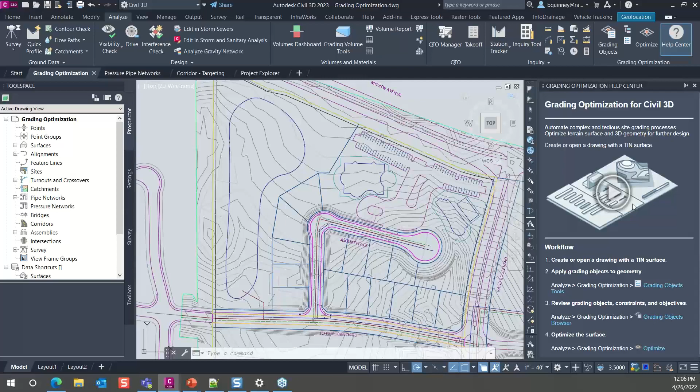Another change with grading optimization occurs with non-collinear feature lines, which means when this information is returned from the grading optimization, it doesn't duplicate your feature lines. It takes into account the same feature lines that went into it. Trying to figure out how to best say that. So it minimizes a lot of program instability that may happen from these objects occurring in the same site in the same space. So that is a huge improvement.

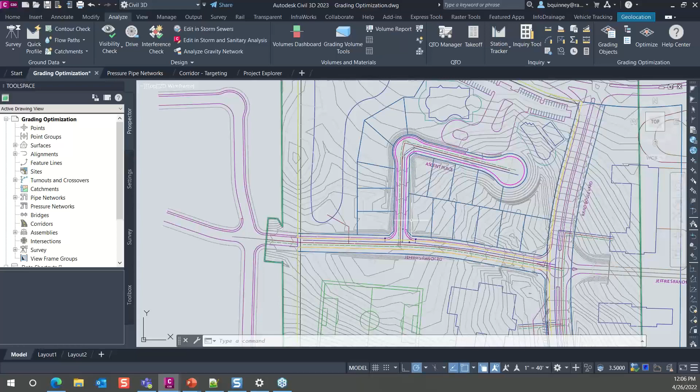What I want to do with this space here, I've got this set up. Since I'm discussing grading optimization, I've got a couple of items here in terms of my grading limits. I've got an inner limit for the whole site, set some parameters in place.

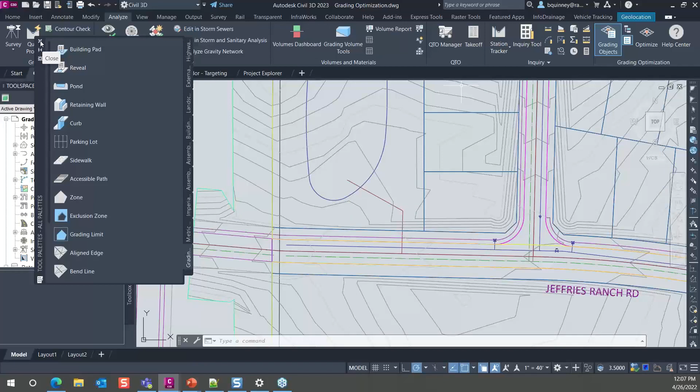This may be new for some of you who have not delved into this feature in the previous release. This is some very good stuff, and it's accessible through your tool palette. So assignments are easy to assign to your object and the geometry within the drawing, for being able to assign various parameters, building pads, zones, low points, drain lines, and the like.

So in the optimization, I'm going to jump in there. I've already got some overall setups going. For those who've seen this before, it looks a little different. There's been some cleanup in terms of how the grading optimization is arranged. We've got the progress meter that's been updated to give you a better sense of where it is in the optimization. Usually it hangs around between 0 and 10% for a long time, but that depends on your site.

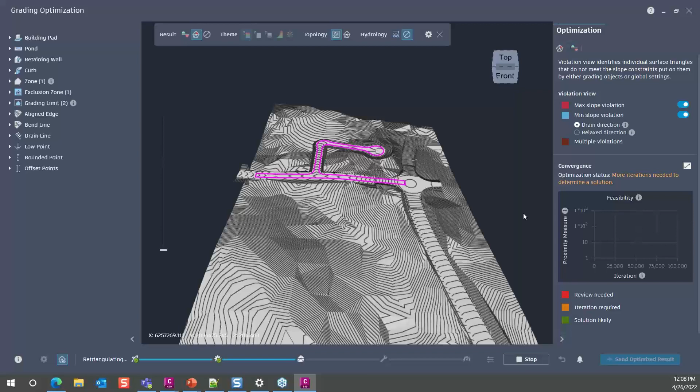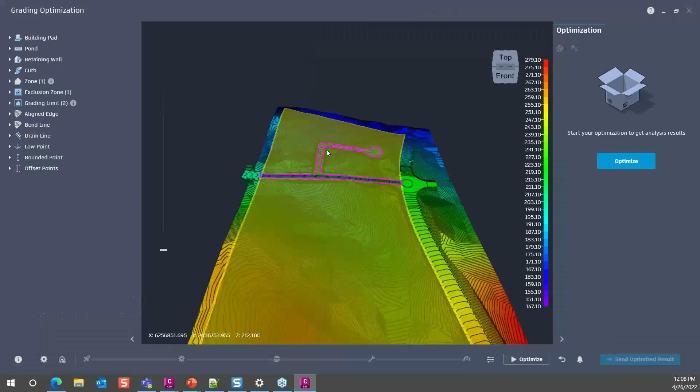You'll notice in here now when we optimize, and notice I did jump in without having to set any parameters or anything, we've got some retriangulation going. It gives you the progress, shows us what's going on. And I did kind of move over. Excuse me, my optimization just kind of got out of my way there for a moment. Let's see if I go back in there. All right, let's try that again.

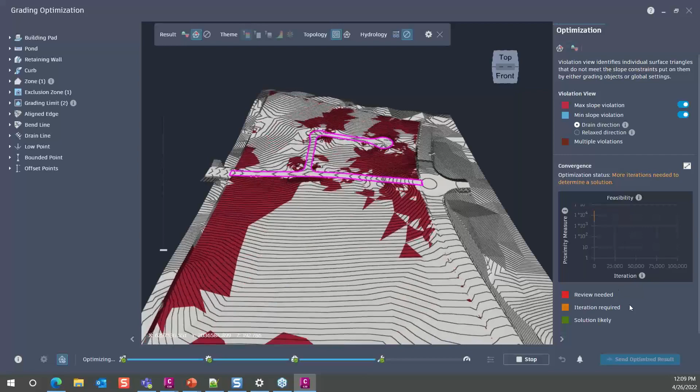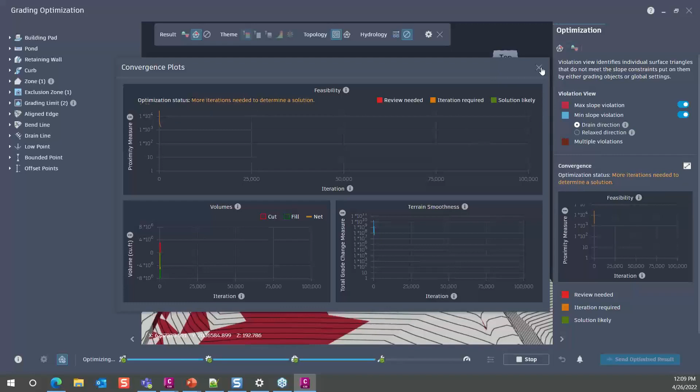All right, in that optimization, everything's moved over here to a panel for the optimization to allow you to make certain determinations, adjustments, be able to reveal things going on within your feasibility charts and graphs. So if I want to take a look at my convergence plots, now they're accessed with a simple icon over here on the side. And as I mentioned, there's the progress down below showing what's going on at what time.

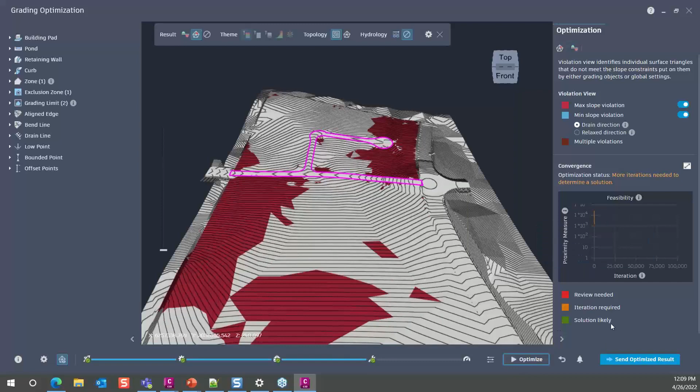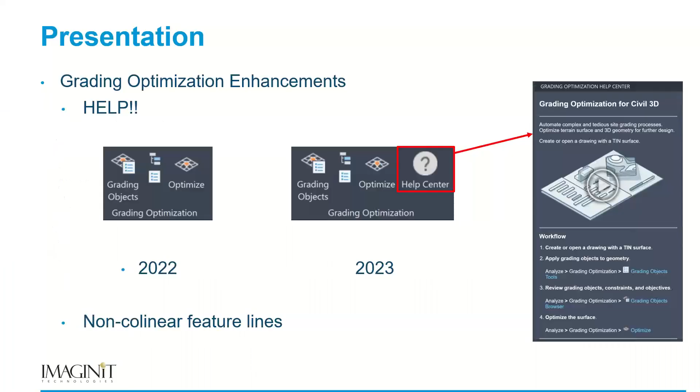There's also a notification center that comes up when there are errors or problematic parts that may happen during an iteration of the process. I'll go ahead and stop that there. Don't need to send the optimization back, but that's a nice reorganization of the grading optimization feature. There was a lot of guesswork in terms of what we were looking at in the progress meter, so that definitely helps clear that up. The steps you'll find in there are the start, prepare, retriangulate, pre-check, and optimize, so you'll know what's going on whenever.

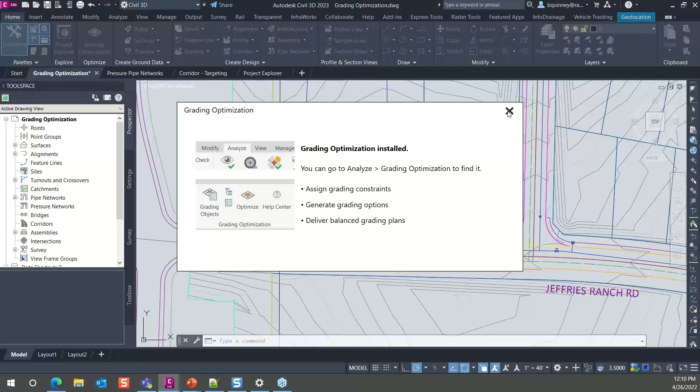That notification center and this ribbon button on the home tab, you'll hear about this being mentioned, or you'll see it by default when you jump into it. When looking at that home tab, let me tell you a little something about this guy here. It's not going to jump to the tools. It just lets you know whether it's installed or not and where to actually go. So ladies and gentlemen, please still go to the Analyze tab in order to run the optimization. Don't let that fool you.

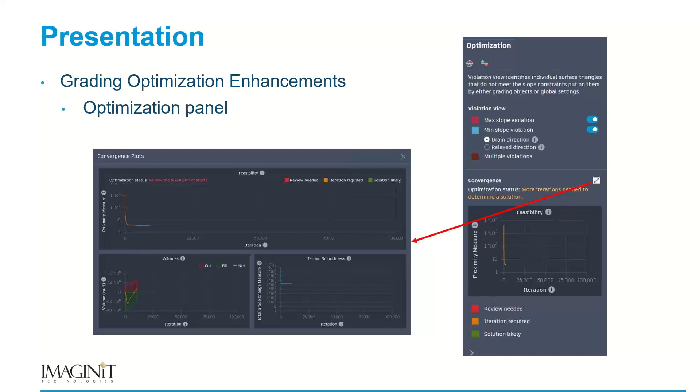All right, jumping ahead, this was a little bit about what we just saw in terms of the optimization panel. So I did get a little ahead of myself. So that's grading optimization. Next, we'll talk about pressure networks, fit and finish. A couple of different additions or enhancements have gone on with this. One, which I really like, is being able to search for your parts when you're adding pipes. For those of us who have very lengthy parts lists, we may find it easier to just search by keyword when adding a part. There's also some grip editing and the profile view improvements, a few other things there.

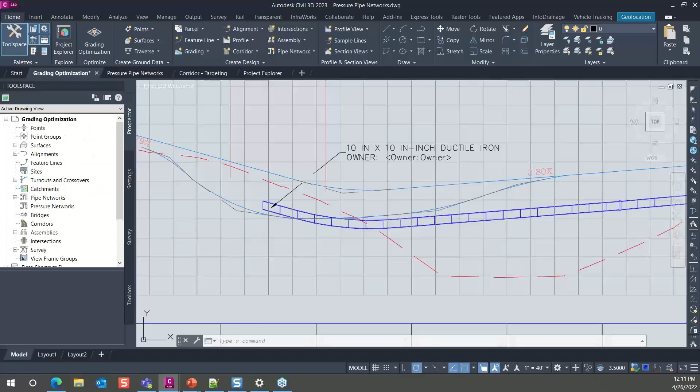Give me a second, let me jump over here and start talking about a couple of these. That first one had to do with adding my pipes. If I had a long parts list here, and I am in the upper left, I have a short list here, but the search for keyword shows up top, allowing you to start typing matching parameters or namings to your pipe so it can jump right to what fits that criteria. So that's a really big help. I've seen some very long and exhaustive parts lists that function better when you can easily find what you're looking for.

I've got right here this profile view, and jumping to talking about property sets for a minute. For those of you who work with property sets, you can attach some additional information about parts that are in your drawing. I've got a label style here that says I want to know who the owner of this water line is, for instance. And it's got a placeholder right now because it is not assigned. The addition for 2023 is that when you assign it in plan view, it will automatically assign to the pipe so it will show up in your profile labels.

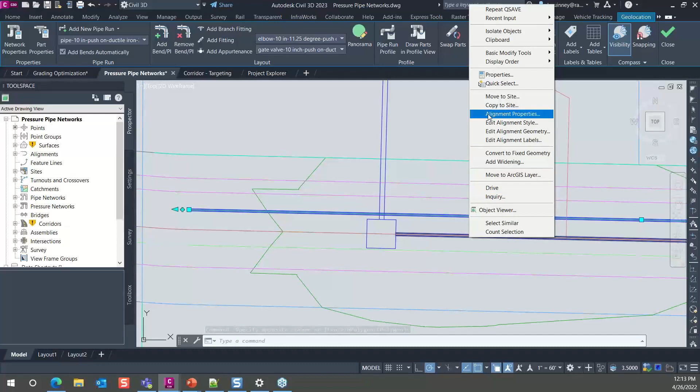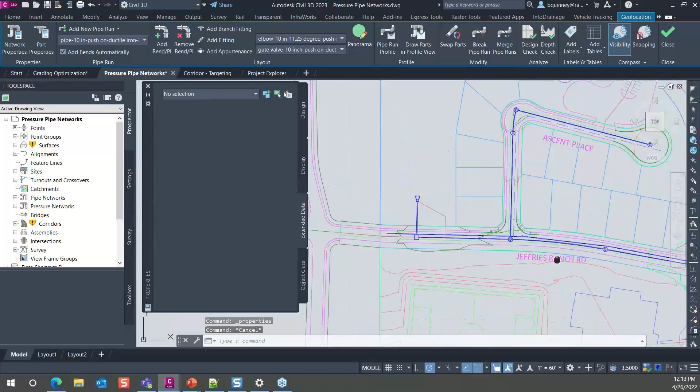So for instance, I'll select my pipe, and in my properties, jump to my extended data where I'll add that property set for the owner. Now I'd already pre-populated it with municipality X, for whoever that may be. So then when I go back over to my profile view, I think I either picked the wrong pipe or,

My first bungle. Funny how that shows up when you're practicing this sort of thing and you need it to show.

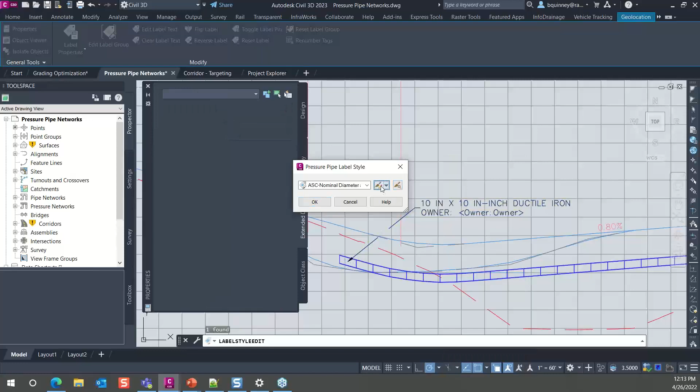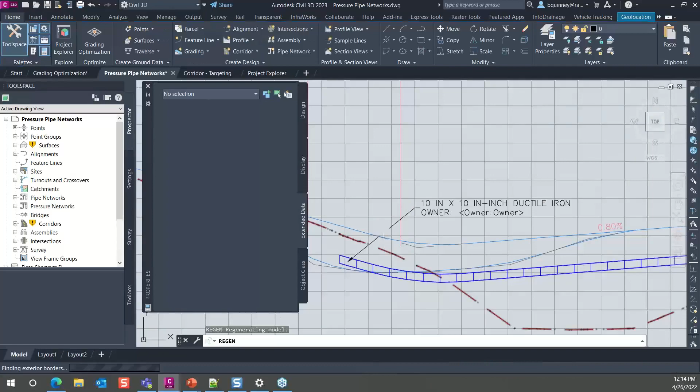Okay, give me just a sec. Let me verify something in here. In my label component, I'll go to property sets. Yep, I've got the uppercase. Everything looks right. It's interesting. It didn't like it. Wow. Well, that's number one. I'll start doing a count on myself here.

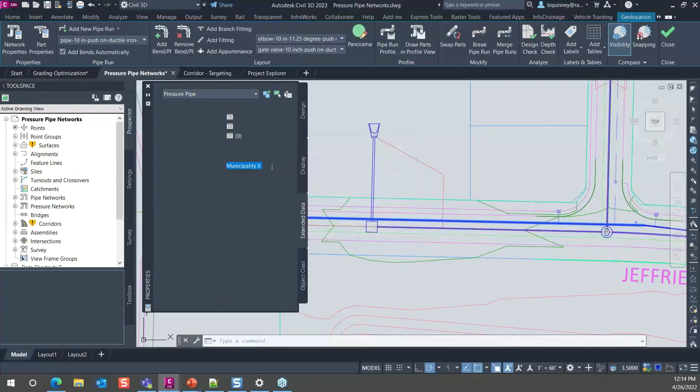Let me just make sure that that pressure pipe did get it assigned properly. Okay. Doesn't look like it took in there. Now, while I leave that up, let's go see. There it is. Okay. I may have bailed out before doing my correct assignment on that, so my apologies on that. Okay, so the information gets populated automatically once you have assigned the property set, and I just kept it simple, just looked at the owner of this for any labeling purposes, or identification.

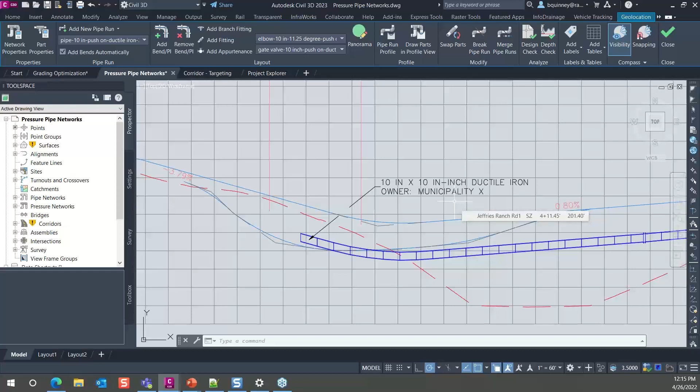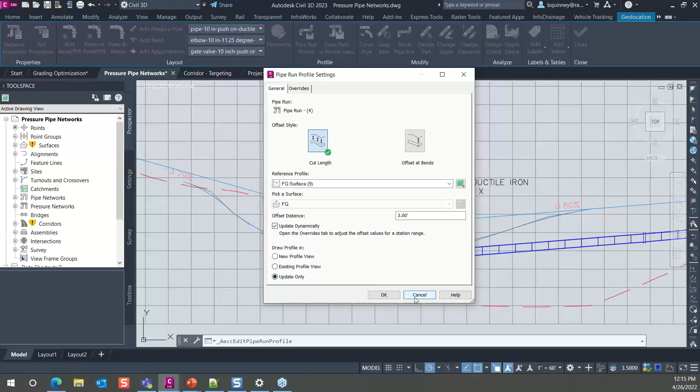You're also able to follow different profiles in a pipe run using your overrides. So there's that feature that when looking at your pipe runs, profiles, when doing your overrides, you're actually able to follow different profiles. So that's pretty helpful for when there are exceptions to certain areas. Being able to say from this station to this station, don't refer to the overall reference profile, use this other one instead. Okay, so that's a pretty slick feature, actually. All right.

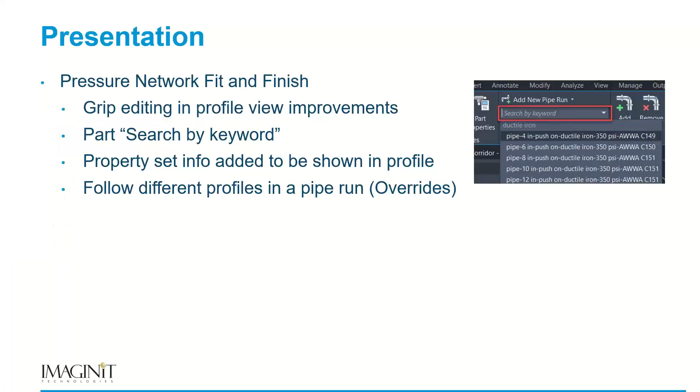Rail. I know a lot of you do not work with the Rail component. This has been there for several iterations, and there have been massive improvements each time for each release. However, a new one for this, in which I'm questionable as to why it didn't show up before, I guess the functionality or the need. We start with the need first, then get the functionality in. There's the English or US catalogs, as well as a conversion script now. So you're able to convert XLS or spreadsheet formatted specifications to be able to generate a catalog.

Okay, so a couple of things that occur here with Rail. If I hop back over to one of my drawings, and it doesn't matter because I'm not about to draw out some Rail. In the Rail, when assigning your turnout catalog, similar to pressure pipe networks, you manually load your catalog here. It's not chosen somewhere else. And now we have a number of additional catalogs. Before, it was just France and generic metric. Now we have US, imperial, and metric. And a key here is that it must match the units of your drawing.

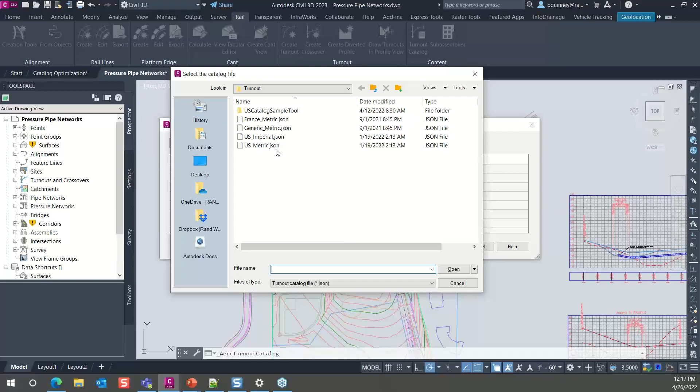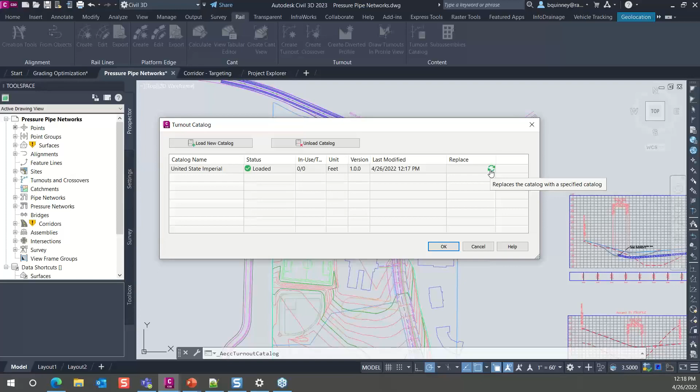For instance, if I try to load this metric, I'm presented with this error, that it must match the unit. So there is a check going on. I will load the imperial, however, and it lets me know that it's loaded, what's in use. And there's also a new functionality which allows you, instead of unloading your catalog, which can cause problems, to replace it. Of course, there are some caveats behind the scenes in terms of what's common between what's getting replaced and what replaces it. But it keeps all of that geometry in place and all assignments within. So loading that, and you're ready to go.

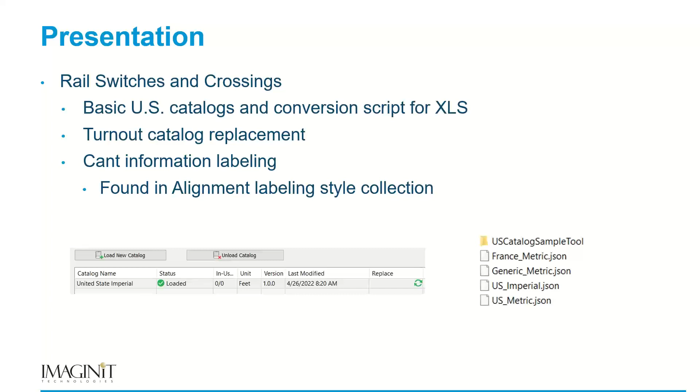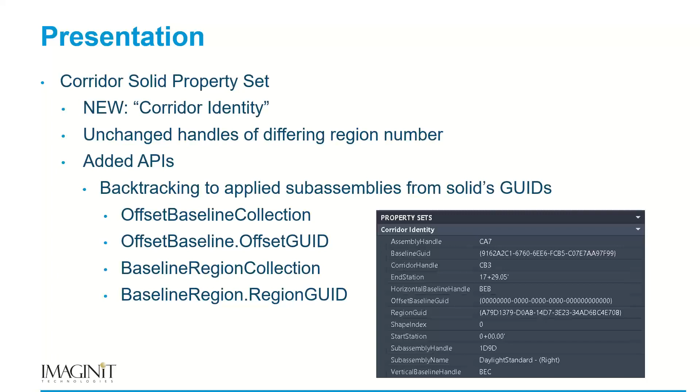Further, you have the CANT information labeling, which does apply with your alignment labeling style collection. So there's now an additional feature for being able to identify CANT information within the alignment. So that's pretty helpful. Another feature that a lot of advanced users use has to do with working with the GUIDs with corridors and their corridor solid property sets. That's been expanded to allow the APIs to backtrack and refer back to solids that were generated within regions, any applied subassemblies as well, and looking at unchanged handles for any region numbers that differ. Previously, the handles had changed, but now they remain in place for you. So that minimizes a lot of confusion, a lot of application issues that may arise when things start changing behind the scenes.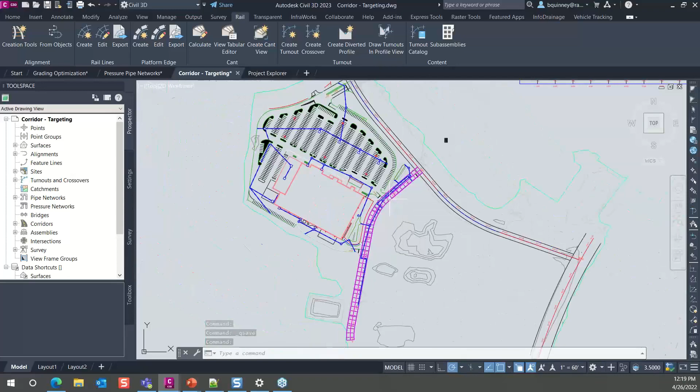Corridor targeting. This is a really nice feature that I've really taken a liking to. First off, there's a tab separated interface for targeting your surfaces versus your alignments and profiles. So if we go take a look at our corridor targeting, we've got this corridor that hasn't had the daylighting applied to it that I added. So if I jump into my corridor properties, and yes, I like going through the whole parameters corridor property tab. If I look at my targets for this region,

the reorganization of this is now in tabs. This was done actually as of last release. But in here, if I'm looking at my surfaces, let's start with that. I have a pull down to be able to set the target for all of my surface targets here. Okay, you can choose them here as well.

So you can manually select, set all, or set all up here. Same thing for my offsets and elevations. Here's an additional interesting feature: for my offsets, I can point to layers or point to specific objects within layers.

Before, we had the ability through the pick box to manually pick on screen what your objects are. But if you have a dedicated layer for your targets, let's think drain lines. Assume this was like the center line for anything that has to do with our low points.

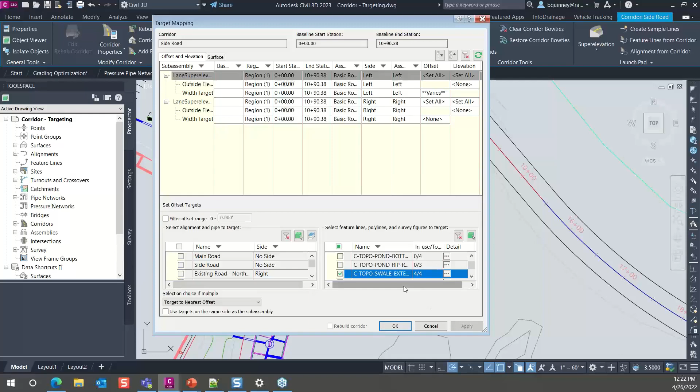Pretty slick stuff there. Actually, I did want to go back in and set that target, don't want to forget that.

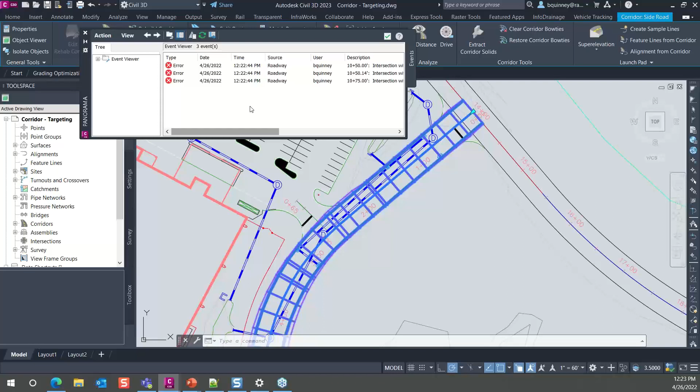Something you may notice, since I don't have anything generating a lot of errors, is that when working with corridors or other objects that bring up information in the Panorama, when you have those long exhaustive lists of errors — say I forgot to set my surface target, a long list of errors for every station would show up. That used to take a long time depending on the complexity of your corridor. Now that interface has moved a lot faster. Populating that doesn't hang the display, nothing like that. It snaps through pretty quickly.

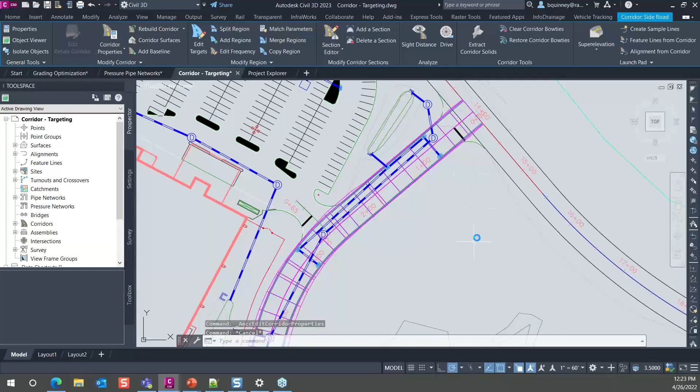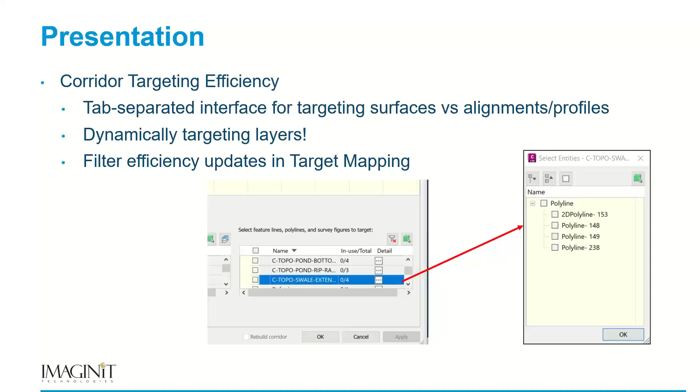So I'll wipe out any proof of that and we'll move along. Being able to filter your objects within your corridor targeting is very new, and the dynamic targeting of layers is very good stuff.

Let's talk about Project Explorer. There are some enhancements here in terms of your tables and reports, with customization of text summaries and notes in your tables, and the sums or totals as well, and they're dynamic.

Keep in mind your Project Explorer has been kind of a modeless or headless operation going on in the forefront, but you can still navigate around in your drawing. When you make a change in your drawing graphically, it's reported in the reports and tables. You can specify row heights too, which has gotten a lot better in terms of appearance, since sometimes information is either lost in a large cell or minimized and unclear within a smaller cell.

Another new option is the compare to functionality, where I can compare information to other types — for instance, being able to compare point groups, blocks, and parcels to feature lines. So those will now be in there as well to be compared to.

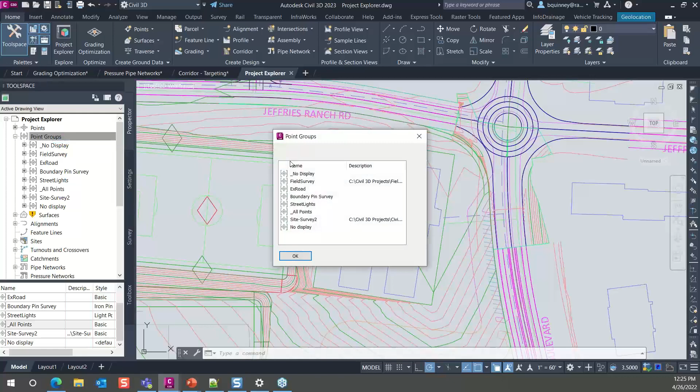So let me jump backwards. I want to show these points so I can show some relevance here on this site. I want this field survey to actually show up because maybe I want to see the relevance or relationship between these trail points that are going to be overridden for this new site. I have a feature line here for the site of this building, the school, and I want to look at this through the Project Explorer.

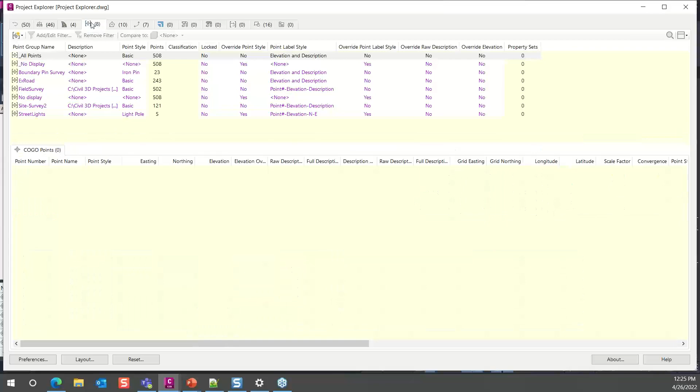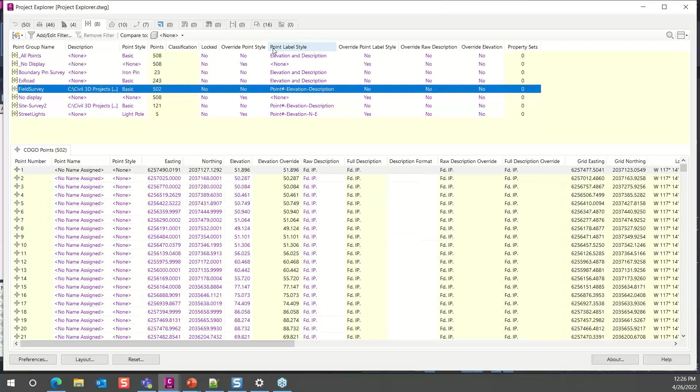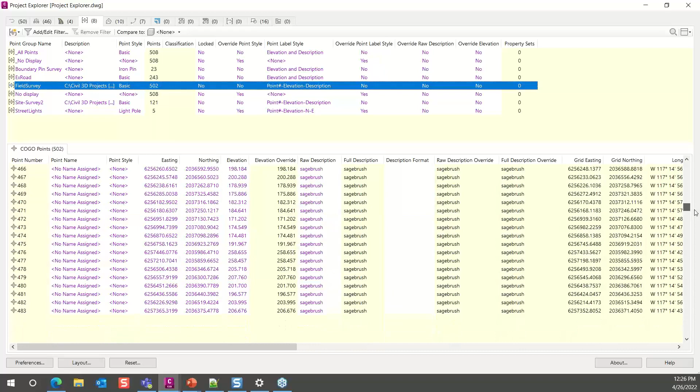In here, I'm going to look at the point groups. The one I'm interested in is the one I just moved to the top, which is field survey. And the point number I'm looking for, I believe, is 533. Let's move that out of the way and we can verify that — yes, 533, this guy right here. Once I look for that and locate it, 533, we'll look at some of the properties of that one that just sits there.

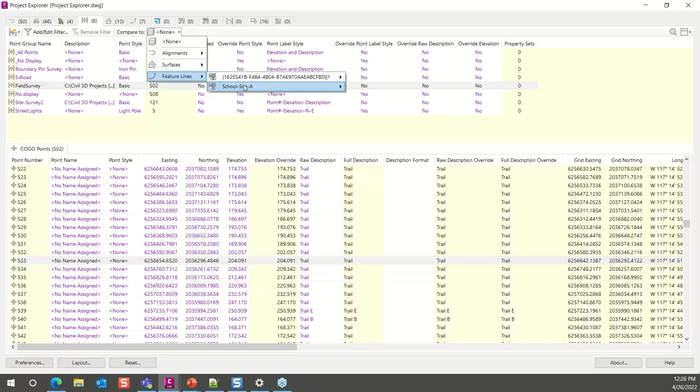Typical point properties, nothing you haven't seen before — northing, easting, and all that. But I can compare it to different features within the drawing: alignments, surfaces, of course. But there's a feature line I want to take a look at in that school site, and say, well, with that boundary, let's look at some information. Now that elevation is 204 and some change.

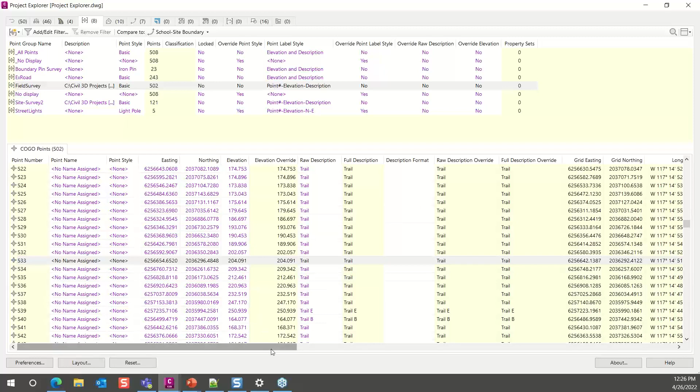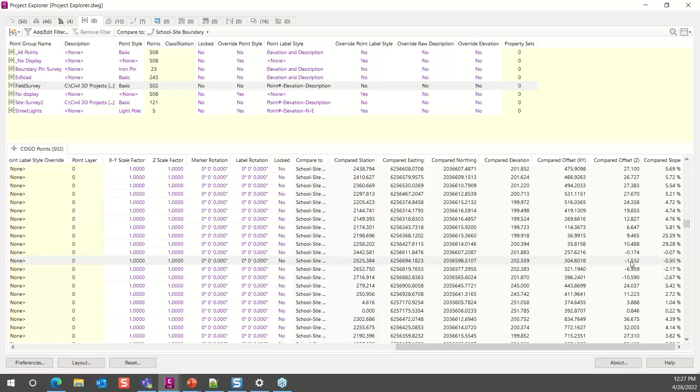So I'll scroll all the way over to the right, and I'll move slow since I'm not sure how it's updating on your end. And I'll look at the compared elevation to the feature line. So the compared offset is this — this is the difference between those points. So before, we've had alignments and surface data you can compare to; now we have feature line data we can compare to as well.

For those users who have delved into working with the subassembly composer, getting some very complex situations manually working with your subassemblies, there's an additional feature, the auxiliary curve. It's similar to the auxiliary line and point objects, where you call out the tessellation, the points you want to define your curve, whether it's a parabola, two points, three points, what have you. So there's that new object in there.

The other change for the subassembly composer is, similar to the regular drawing environment, you get that little asterisk next to the PKT name when working, letting you know of unsaved changes. So there's a lot of continuity that has occurred behind the scenes with subassembly composer, as well as a lot of different features within Civil 3D following the same naming convention and program understandability. You'll notice the icons as well in different places, surfaces, alignments, and everything is even more continuous than we're used to seeing.

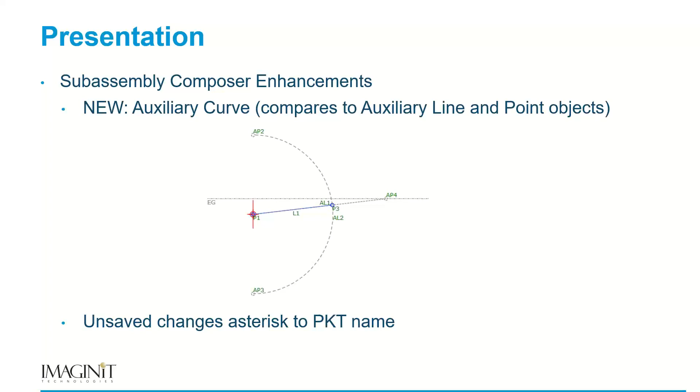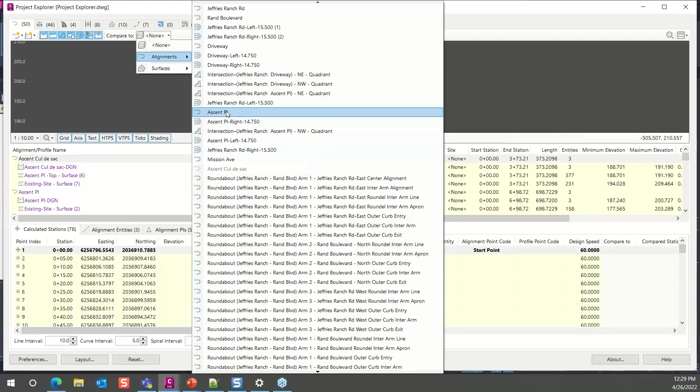Project Explorer is an example, able to identify your objects by the very familiar icons and what you're comparing to. So jumping back there, you'll see the ease of use because of our ability to understand the icons, and even when comparing something like alignments, I see the same similarities between the different icons, whether it's offsets, curve returns, or main alignments. Okay, enough of that.

A lot more performance enhancements. I love how this version moves a lot smoother than even 2022, and that was a pretty smooth moving application as well. There's a couple of reasons why.

One, at the bottom, this graphic system has been updated. Version 2022 is shown on the left in this image, and the one on the right is a new entry for the 3D config dialog box, which gives us the ability for fast shade mode. This takes advantage of updated graphics cards and multiple CPU cores to make better use of cross-platform abilities, okay?

There's also another one, viewport performance for section viewports. It's called the AeccViewportOpt, what you see there. What that says is, in a section viewport, anything outside of that viewport is not even regenerated. So when working with plots, when switching between layouts, anything outside that viewport is ignored. Even in a profile and section view viewport, anything outside of that station range is ignored. It's not even regenerated until you go to a viewport that's applicable to that range.

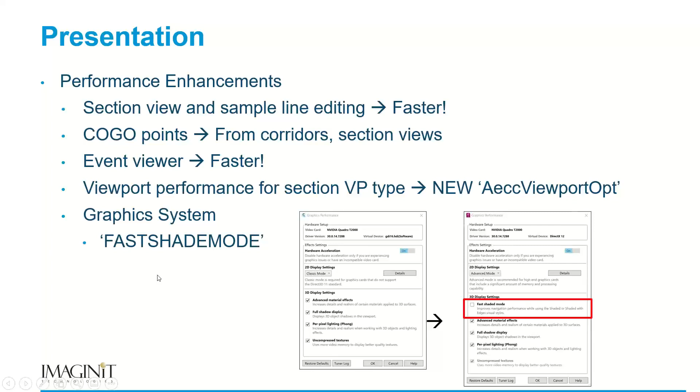As I mentioned before, just kind of jumped into it - Dynamo, for those who are into the programming interface, the core has been upgraded to 2.13. Also, Sheet Set Manager for web is available when working with Autodesk Docs. Things you can do there are publish, transmit, create and remove sheets and subsets, and there's data locking, which must be there in order to ascertain who has ownership of certain sheets at the time of access, okay?

There's many, many more fixes and improvements, renamings, different enhancements. I've got them on another screen, and I know if I point out any one of them, I'm opening the door for a ton of other things to follow up. But there's a lot that is well documented in terms of their fixes from previous releases - various issues that were realized, whether it's stability or just the simple performance of particular commands or features. And as I mentioned, some notable renamings that keep everything in line in terms of the continuity of the application.

Okay, that's all I've got for you, some of the higher level items. So that ends what I have for this portion. At this point, we can start addressing some of these questions.